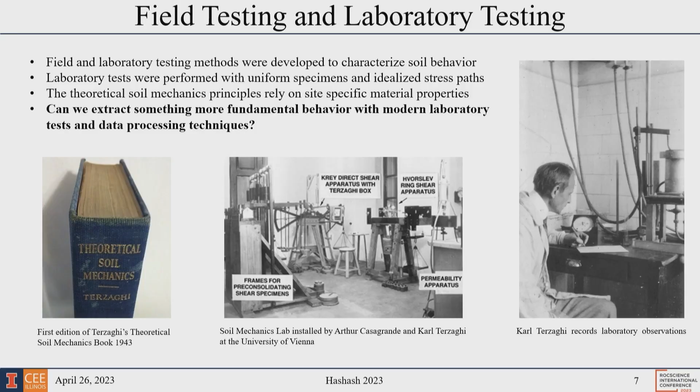And the question would be, can we extract something more fundamental in terms of behavior? That's the same thing that Karl Terzaghi has to deal with at the time, but now with our modern laboratory tests and data processing techniques. We're still doing laboratory testing, field testing, data collection. The question is, do we keep on doing it the same way, or should we be doing it differently?

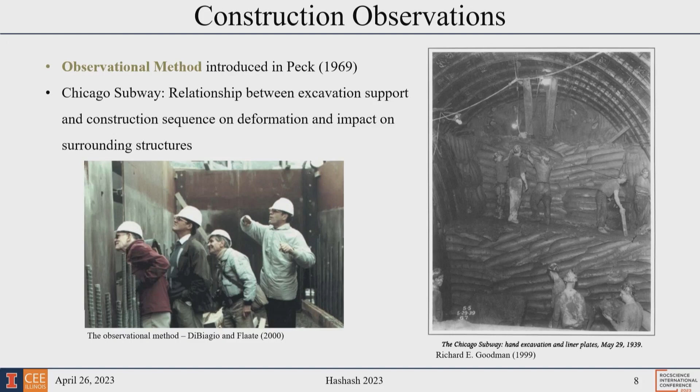The observational method has been very fundamental. It's a cornerstone of geotechnical engineering. And kind of the terms were coined during the work on the Chicago subway, where a young engineer by the name of Ralph Peck was the deputy of Karl Terzaghi to go and watch over construction. Professor Peck carried these concepts further and developed them and coined the term of the observational method. And the idea is you develop an initial design, but then you have to adapt during construction as the true nature of the ground is revealed and the true nature of the construction, means and methods, happen.

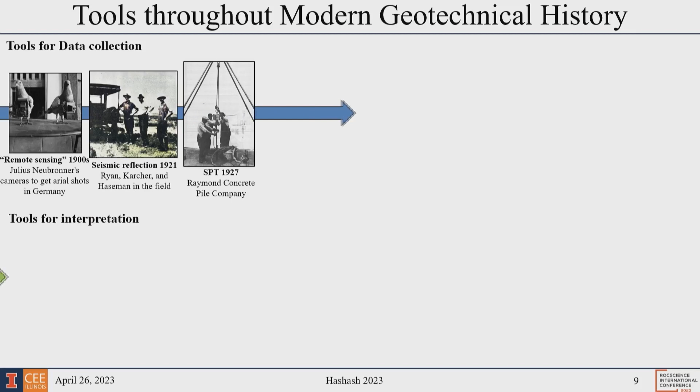Our data collection tools have evolved. We had the remote sensing from the very beginning, sort of early 1900s. But nowadays, we're dealing with things such as InSAR and the Internet of Things in terms of monitoring. We are able to collect a lot of data.

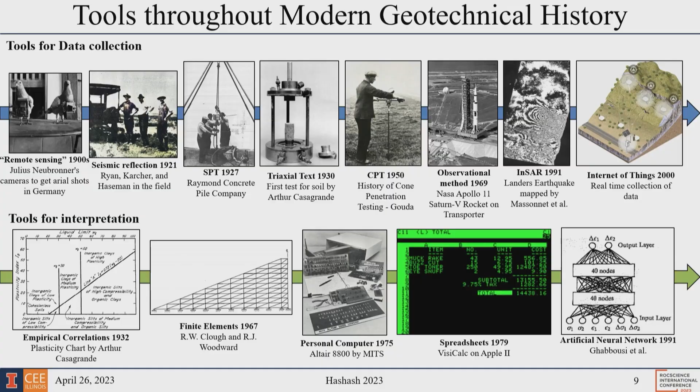Our interpretation tools range from simple graphical interpretations, which are, by the way, extremely important for us, to artificial neural networks, these really interesting black boxes that do things that we like to think are actually relevant and important for us. In geotechnical engineering, we've been working with machine learning since the very beginning.

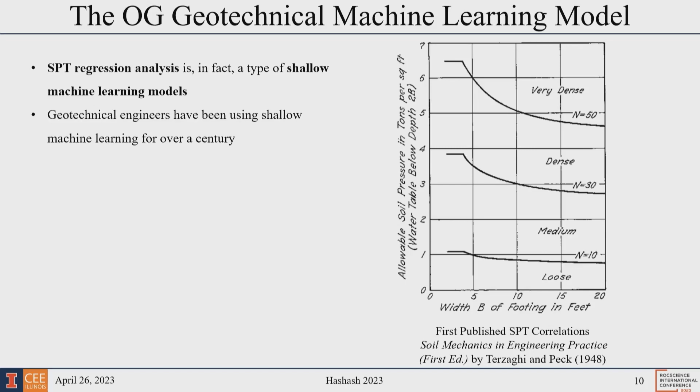This is the OG, the original type of machine learning, whereby you're looking at a correlation between an allowable soil pressure and a footing vis-a-vis different types of soils, for example. Other types of correlations, you can think of them as what we call now shallow machine learning. These are the correlations that we use extensively in geotechnical engineering, and that's really something that it's important now with the new tools to think about in the right context as well.

Of course, when we started the modern adventure of geotechnical engineering, we were suffering from the lack of data. We are facing the opposite problem nowadays, which is a lot of data, maybe too much data. Or maybe it is that we do not have the appropriate tools to manage that data and tease out, extract knowledge and information from that data that would be helpful for us. So that is something that we want to explore.

So let's talk a bit about artificial intelligence. Those of us who have been around the block a lot have seen booms and busts in that technology. And it seems we're at the cusp of something different nowadays.

If you know about Alan Turing, he solved the Enigma, and was a major role in defeating the Germans during World War II. Actually wrote about it in a journal called Psychology and Philosophy, which is interesting. Computing machinery and intelligence is what we want, a machine that can learn from experience. So the idea of artificial intelligence is not new. It's just that people had a vision, and it took a while to realize that vision.

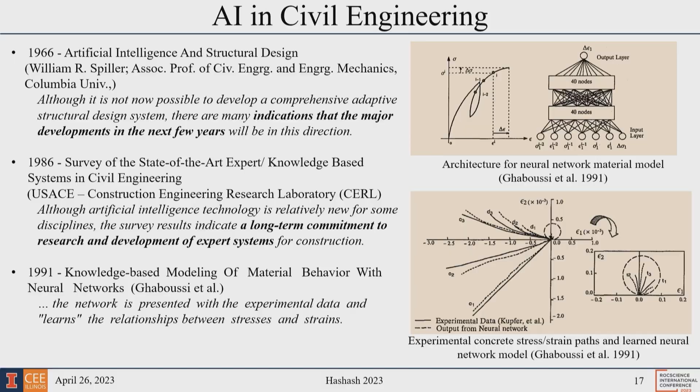So let's show you some selected applications in geotechnical engineering. I'll talk to you first about tunneling-induced ground response and seismic site response analysis. Let's start with tunneling-induced ground response. I'll talk about three topics: operation optimization, ground condition estimation, and tunneling-induced settlement estimates.

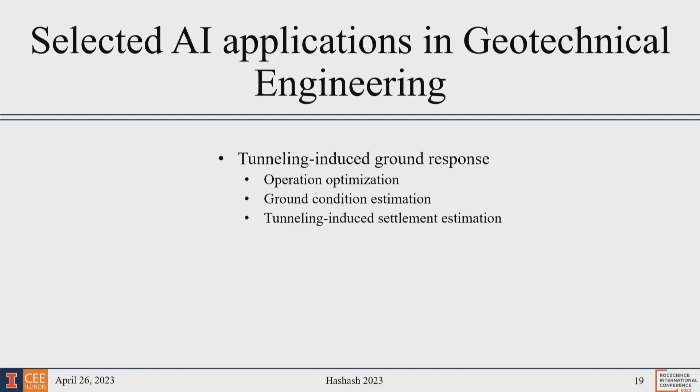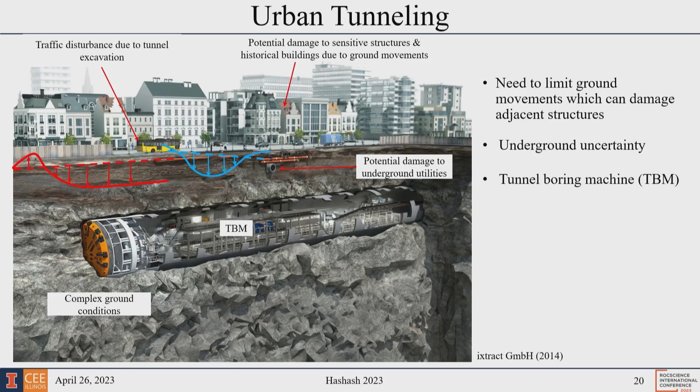Modern tunnel boring machines are amazing technological innovations. If you haven't had the chance to be familiar with them, I encourage you to do that. They're highly automated, very capable, and they're in fact allowing us to tunnel through ground that would have been difficult otherwise, or not using non-mechanized tunneling machine technology. They have a lot of sensors throughout, that's how they do a variety of controls. The number of sensors is a lot, and I'll give you a sense of the data in a minute.

But there's all this data. If you think about the tunnel boring machine, it is one big borehole or CPT or a probe that you're taking through the ground, and it's reacting to the ground. So can I use it to tell what the ground is or how the ground will behave? Can I take that information that I'm collecting and do that?

So the first thing is TBM operations. You're trying to steer it, make sure the tunnel goes in the right direction. Then trying to figure out how to adapt to varying ground conditions, because no exploration program is perfect. And then how we can do some type of estimate of ground movements, which is a really big deal in urban areas, whereby you're trying to minimize ground deformations. So I'll talk to you about AI applications in these three.

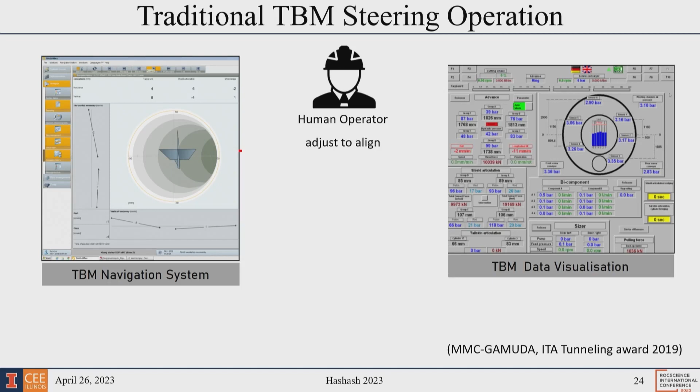So let's talk about operation optimization. What it is, you're trying to make sure that the TBM remains on track. If you've ever been down in a TBM and looked at the controls, there's that kind of cross, and you're trying to make sure the dot is matching it. You can manually adjust the various controllers to align it, or you can actually use an AI type of model.

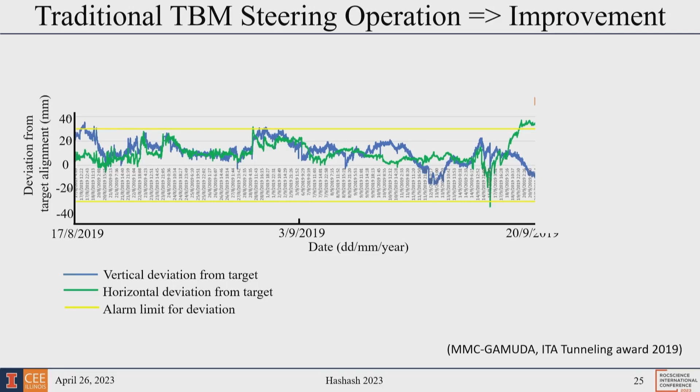If you go beyond it, you're really getting into territory that you do not want. This is manual control, and you can see how there's a lot of oscillation. This is all controlled by an operator.

But now if you use a planning AI type of algorithm, you can see it very rapidly converges to the exact location. It's taking all that feedback from the various sensors and actuators, and now it's able to steer at a level of precision that is unprecedented. And that's because we took the human out of the loop and let an AI planning algorithm do that for us.

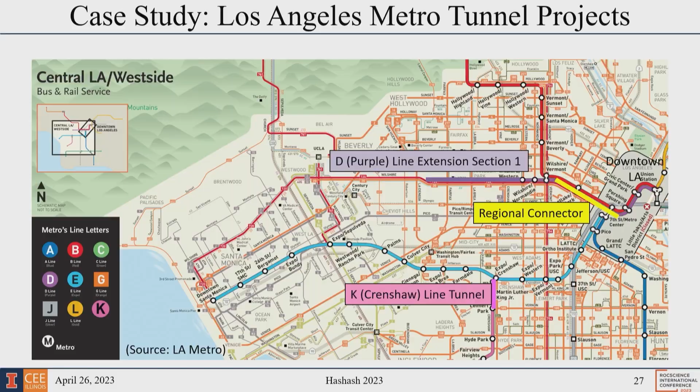So now let's talk about another application from these tunnel boring machines, which is ground condition estimation. We have a collaborative work with NSF and Los Angeles Metro, where, as some of you know, there are several lines being built and more to be built.

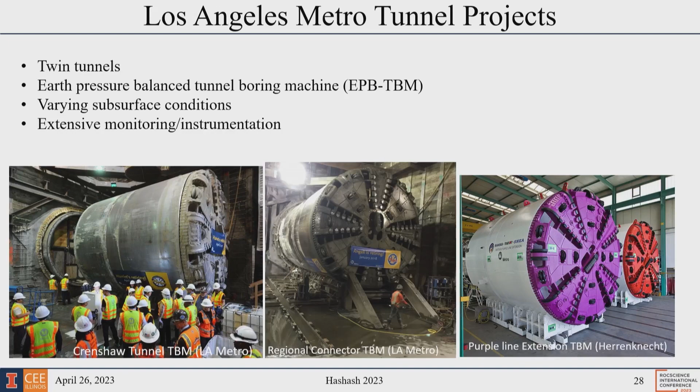The idea is to see if we can get all of their extensive monitoring data and try to make sense out of it. So we picked several lines, we're collaborating with them, and this is an ongoing effort. Fortunately for us, as part of an extensive collaborative effort, we are able to access all the data that they can provide us. So we're looking at the Crenshaw line here, and there's data along this line - it's just 1 mile long. We have about 3 million ground movement data points and 1 billion tunnel boring machine sensor data points.

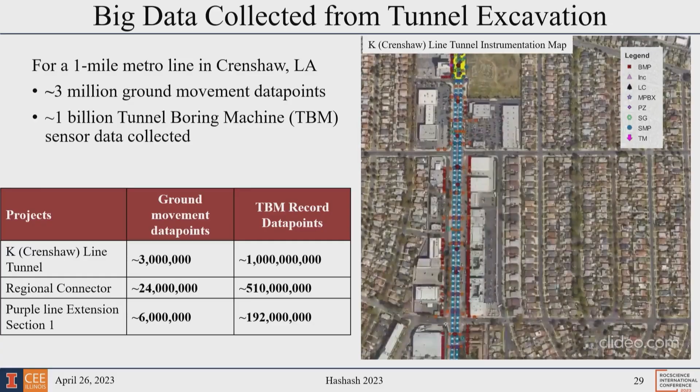We cannot, as humans, deal with this much data. We therefore selectively pare it down to make sense out of it, but by doing that, we're actually losing a lot of information. Can we use all that information?

So one thing we tried to do is use all that TBM input to estimate ground condition. And differing site conditions is always a big deal in tunneling. So we went through a lengthy exercise, and I can elaborate on it later in the Q&A of how we selected those.

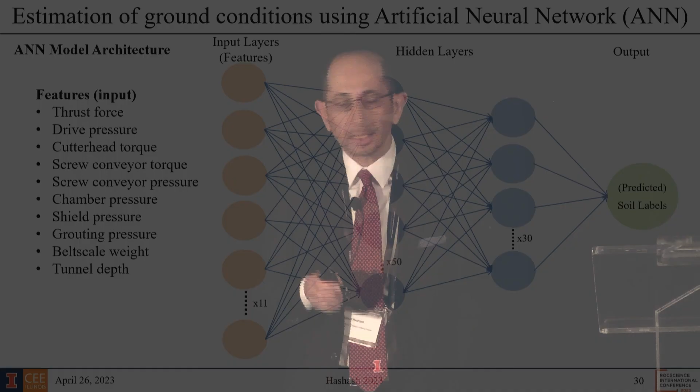We selected this data and used an artificial neural network which has an input layer, an output layer, and two hidden layers. The exact architecture of the neural network, by the way, does not matter as much - it has a little bit of play, but that's not the purpose of the conversation here of how to select it.

The idea was: if I use that input, can I have soil labels so that I can look at the ground? For training data, we used the site exploration data. They had a number of boreholes along the alignment, and we assumed that the soil label applies within a diameter of about 25 feet around each borehole.

We use the data within that 25 feet to train our neural network. So at the locations where we have boreholes, that's when we extracted the data, but then we also split it - part for training, part for prediction. We ended up having about 5,000 TBM locations that can be labeled from one borehole, because remember, the resolution of the TBM is very high.

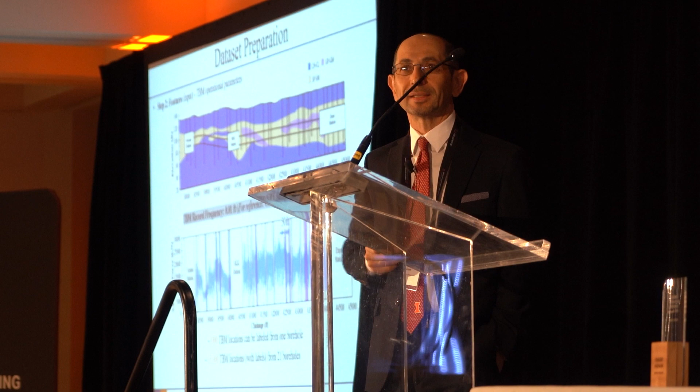In fact, for reference, the TBM recording frequency is 0.01 foot, while CPT sampling frequency is 0.1 to 0.3 foot. So you have a much higher sampling frequency from a TBM compared to a CPT - think about it that way. We need to start considering these factors in how we use all the tools available to us in ground characterization and addressing our engineering problems.

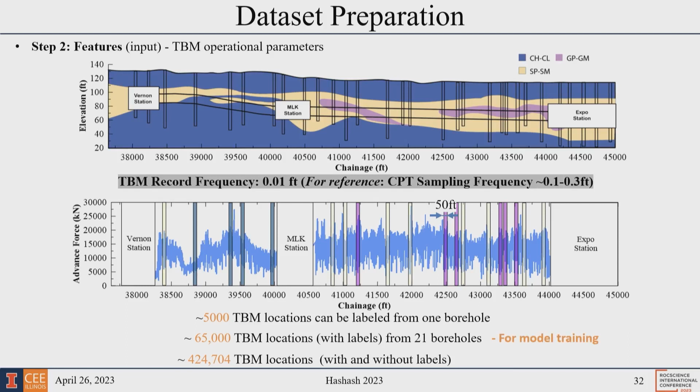So we had about 65,000 TBM locations with data labeled from 21 boreholes, and the remaining locations would be 424,000 locations with and without labels for model training. Then we generate a continuous profile for where we don't know the information, and let's see how that works.

So we split the data 70-30, 70% for training - that's where we know the information from boreholes. And we had the confusion matrix - we heard about the confusion matrix yesterday - and it showed us actually pretty high results.

So look at the diagonal part - the value close to 1 is like perfect prediction, and as you can see, the numbers are very, very high for the testing data, for the training data, and for the whole data set. So we're doing very well correlating the data with the ground condition. We ended up with about 88% accuracy - good enough, in my opinion.

So what we did is said, okay, if you're an engineer, you develop a soil profile - that's an interpolation between the boreholes. That's what we do, sometimes put in a baseline report on which you base differing site conditions. Then we said, let's use our artificial neural network to see what it would tell us about ground conditions between the boreholes.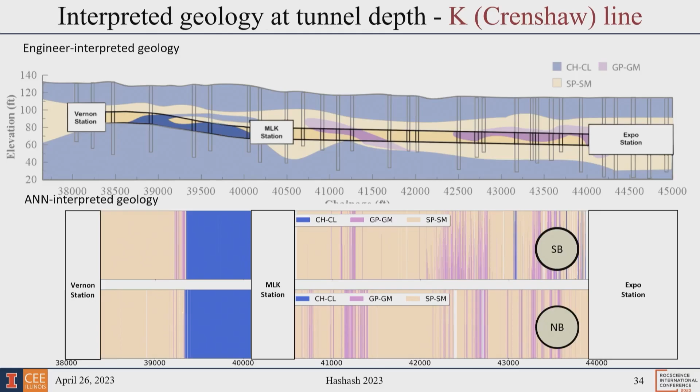In some places it shows us things that are different, and maybe they are indeed different than our interpretation. I'm not saying our geotechnical interpretation, the profile, is necessarily correct - it's our best estimate. But now I have TBM data I'm using to interpret it that way, and I consider it potentially equally valid as to what kind of ground conditions we've encountered.

So it does a pretty good job and has a role to play. It's not only here - you might say, well, you already completed the project. That's fine, but think about projects where you're doing things on the fly. We can do that. Training these neural networks is not time-consuming, it's fairly quick.

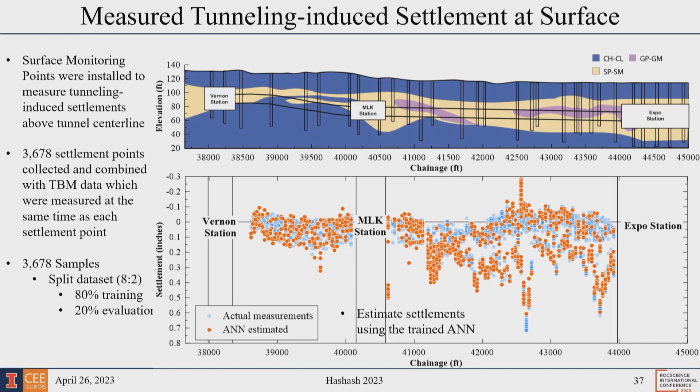Now let's talk about another application - tunneling-induced settlement estimates. Similar set of inputs, and we looked at the output. This is the alignment stationing along the alignment, the vertical axis represents settlements, and the blue points are the measured settlements. We did the training the same way, and you can see the estimates of settlements track very well with the measured settlements.

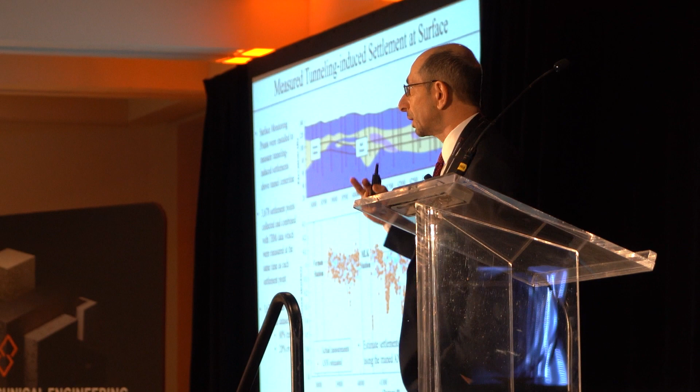So that's useful in areas where you have potentially missing data or some concerns, because you can use the TBM parameters to estimate what kind of ground deformations you get, and that helps in imposing controls on the TBM. It could even be used by owners to make sure the contractor is doing proper face control, proper shield control, pressure controls to limit ground deformations.

We're extending those - we've already extended them to other lines on the LA Metro, and they work well. That's the exciting thing about it. Let me shift now to another application. I'm trying to give you a sense of where we can apply it and how successful we are.

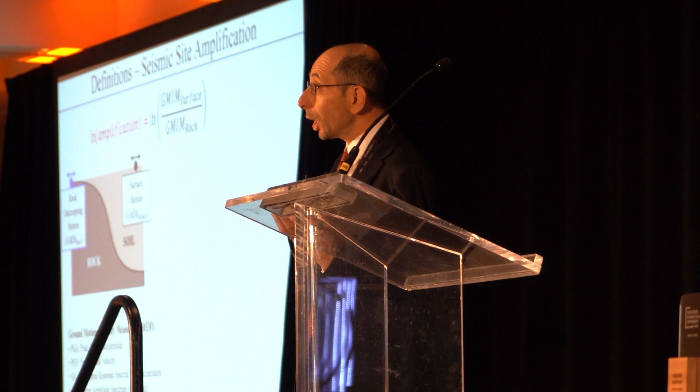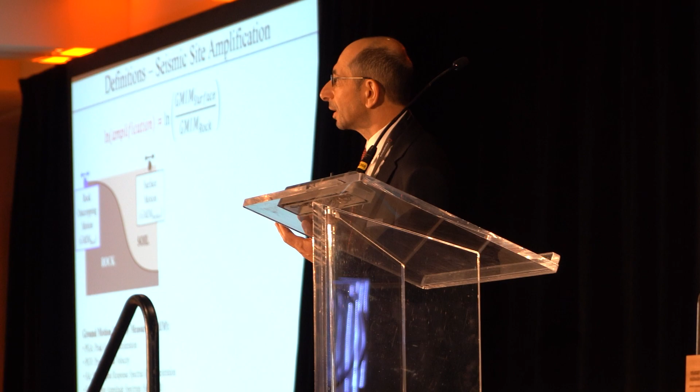Another one is site response analysis. This is something Professor Rathje and myself have been working on for years with other colleagues. What's the problem? If you have ground shaking, the ground motion at a rock site will be different at the soil, because the soil itself does something to the ground motion. It filters usually high frequencies and amplifies low frequency long periods, causing site amplification.

We'll talk about the definition of an amplification factor, which is a measure of the ratio of an intensity measure at the surface over an intensity measure at the rock - it could be peak ground acceleration, for example. We decompose it into a linear and a nonlinear component. A classic model would look something like this: the amplification ratio, the natural logarithm of it, would be a function of VS30 - the time-averaged shear wave velocity over the top 30 meters - plus, say, effect of natural period, plus a nonlinear component.

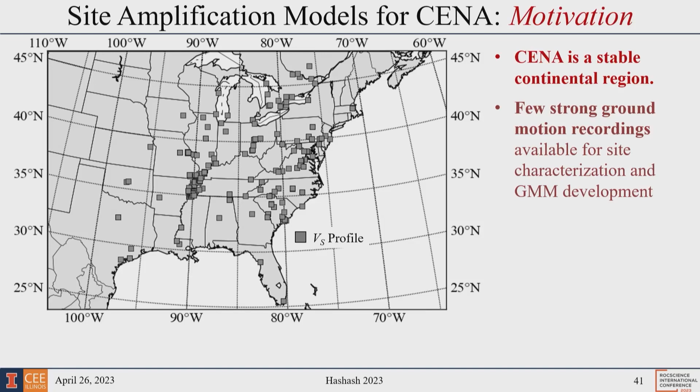Now we wondered if a neural network could do something similar, whereby I'd have the exact same input and some similar output. So what we did - this was a study as part of NGA East, Next Generation Attenuation in the Eastern North America - where we do not have lots of data. So we did a lot of simulations, a large-scale series of simulations.

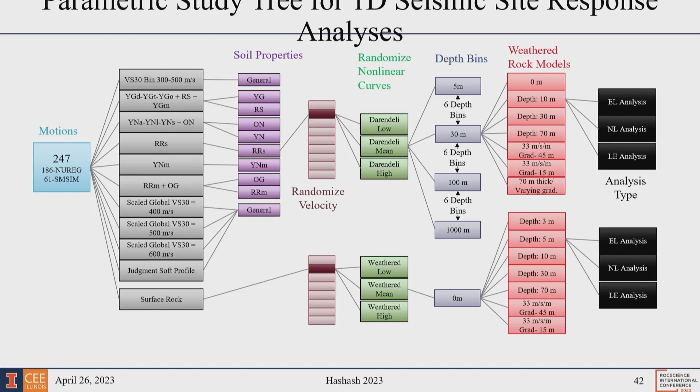It's actually the largest ever done, whereby we encompassed varying ground conditions, a lot of different soil properties, depths, rock conditions, and performed linear analyses, equivalent linear analyses, and nonlinear analyses, using software called DEEPSOIL - some of you may be familiar with it. We ended up with about 3.6 million simulations. You can't do simple regressions with these - well, we tried to get an estimate with these models.

We developed some amplification functions, some of which are already being used by the US Geological Survey in their hazard maps. This is one way of presenting the data. Looking at the horizontal axis, VS30, vertical axis, the linear amplification, this shows the simulations.

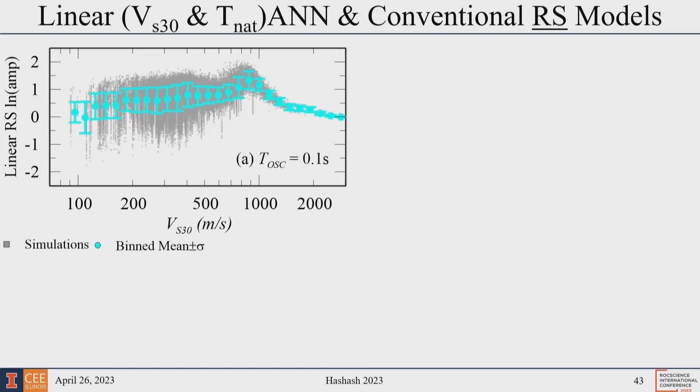This is the bin mean of the data. We're looking at a conventional functional form for the amplification function, a model called L5, which has both VS30 and natural period. You see how it covers the data. And then we have an artificial neural network, using the exact same input with the data.

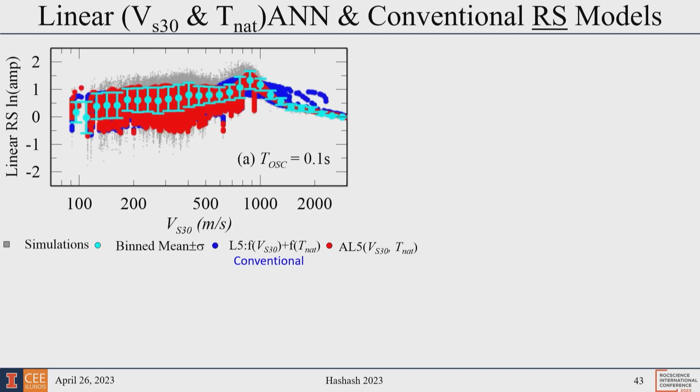What's nice is that artificial neural networks are data hungry, and we had a lot of data to use them. What was interesting is the artificial neural networks were able to capture this behavior. But when we looked at the root mean square error, the same data was used for a conventional regression and for an artificial neural network.

We ended up with a 21% reduction in root mean square error of linear site amplification, on a log scale, by the way. Just keep that in mind. It's a log scale, which means it's a huge reduction in the error.

Same data, same input. So if I give you something, I would hope that you would jump to the one that doesn't give you as much error. In this case, it's an artificial neural network. It was able to capture the whole behavior.

Everything I've shown you thus far is what I would call a rather simple application of artificial neural networks. Now, is there a way to actually extract underlying behavior, truly discover behavior? Something that is really difficult for us as geotechnical engineers. So I'm going to introduce the self-learning concept.

I acknowledge Professor Jamshid Ghaboussi, who took me under his wing when I was a very young faculty member. We spent lots of time talking about this. I'm going to give you applications to excavations, laboratory testing, and then how we can use that to predict real problems. So let's go back a bit to feedback control theory.

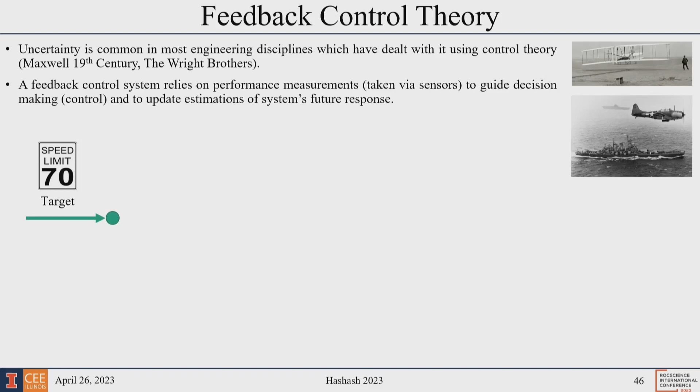Feedback control theory - I think most of us may be familiar with cruise control. You set the speed, and usually if you're doing it manually, you have to do it yourself. You put your foot on the accelerator or the brake, and you adjust your speed. I know we're not very good at maintaining the speed that way, right? So there is an input, and then there is an output.

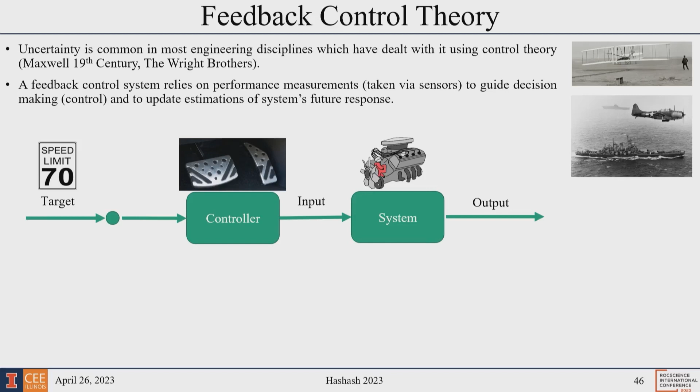Now, of course, people have introduced the automation of that, which is speed cruise control, and it does a very good job, but it's dangerous, right? Because if there's a car in front of you, it could hit it, hence adaptive cruise control. The relatively newer cars have that. I love it, it's great for long-distance driving, I don't have to worry about it. The car itself accelerates, decelerates depending on the car in front of you, and reaches a maximum of the speed you set. So control theory is really, in essence, what the observational method is.

Now let's look at another way of looking at the observational method. You have your engineering design objectives. You develop your site investigation, modeling. You have your engineering design. You go for construction, you collect the data, and then you try to see: is it matching your estimated behavior? If not, you make adjustments and you continue.

Can we automate pieces of that, or all of it? And that's where it becomes a problem. So I'm going to talk about the large data sets - I'm not going to spend much time on that - and talk about an AI-enabled system update.

In order to do the update, it is actually an inverse problem, right? And there are the regular problems: you have an input, system model, output. You are pressing the accelerator, and then the car speeds up somewhere, and then when you see the speed, you readjust the pressure, or automatically the car controls.

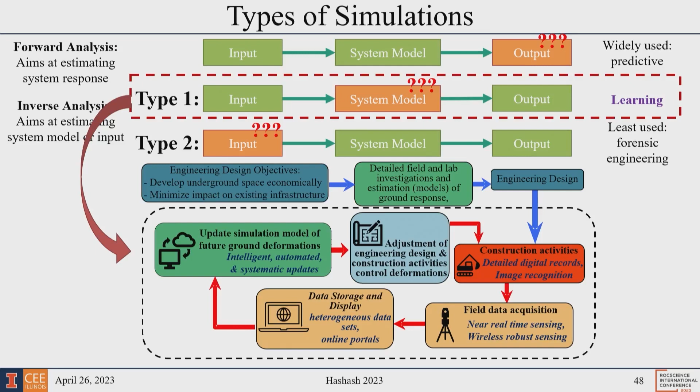There's another type of inverse problem: you know the input, you know the output, you just don't know the system model. And then there's one whereby you know the system model and the output, but not the input. The one we're concerning ourselves with for the observational method, which is a form of a control loop, is actually this type 1 inverse analysis problem. So now let's talk about a self-learning concept.

So in the field, and I'm going to talk about excavations - those of you who know about my background.

I did a lot of excavations, starting with my PhD work, whereby you have some construction sequence going on, so hopefully you kept a good record. And then you have instrumentation, you've measured the response. Now, we always talk about the field is our lab, right? That's what we say in geotechnical engineering. And the behavior we're measuring is a result of fairly complex interactions of our soils.

So can we extract that underlying soil behavior? And of course, I'm here to say, yes, we can. Let's explain to you why and how.

So the way the self-learning concept works is the following. I have two things, and this also comes from a background in finite element modeling. You have equilibrium and you have compatibility. Equilibrium is the equilibrium of forces. Compatibility is displacements and strains, okay?

So the first analysis we do, we do a conventional analysis whereby we're removing our soil layers, and this would be an equilibrium type of analysis. Of course, our finite element analysis will give us both strains and stresses, but since the force and stress conditions are most correct, we're going to say that the stress field I'm going to compute in this analysis is correct, or closest to the correct value of stresses throughout the system.

Then I'm going to run a second analysis, and in this one I'm going to impose my deformations. I'm not going to impose the construction sequence, I'm going to impose the deformations with appropriate boundary conditions. And because of compatibility constraints, the strains I'm going to get out of that are going to be probably reasonable. So from one analysis I'm going to get stresses, from another analysis I'm going to get strains. Stress, strain, soil behavior, right?

So now, instead of using a conventional material model, I'm going to use an artificial neural network material model. Initially, I'll train it to represent linear elastic behavior over a small range. But when I get those stresses and strains, I'm going to retrain my artificial neural network, and forget the data on linear elastic. I repeat that for a given stage of construction, and then for all stages of construction, until the stress-controlled and the displacement-controlled analyses give me about the same answer. That's the convergence. And then I will make a claim that the resulting material model closely represents the behavior that is relevant for this problem. You probably notice I'm using a lot of cautionary or qualifying words there.

Now, when I mentioned inverse problem, you're probably thinking uniqueness. Well, we can talk about that in a Q&A answer. I should just let you know, all the applications we've done with this problem, we've never run into a uniqueness problem or non-uniqueness. So then we can claim that we can use it in a forward problem.

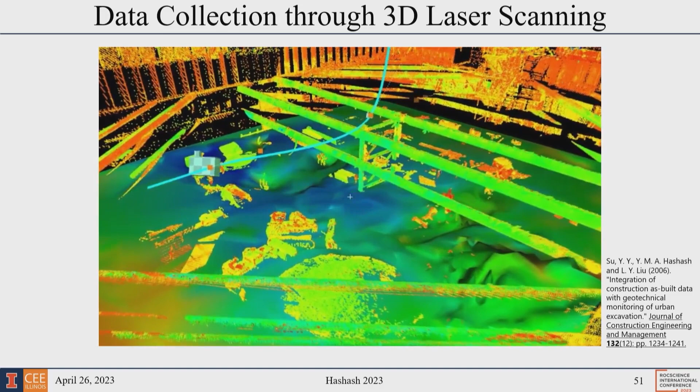So I'm going to show you how we've applied it. Now, again, this has been enabled by our ability to collect massive amounts of data. We can actually scan all the details of our construction sequence, so you need to be faithful to the construction sequence in the field. It doesn't matter what's on the design drawings if you don't go out to the field. I actually had, in many places, to go down to our resident engineers to take the sketches from their drawers, which they were about to throw away, so I could have a correct construction sequence.

And then the data — we applied it to one, the Stata Center, and thanks to Professor Whittle, my former PhD advisor, who got access to all of that data. We had some sections there, so we could actually perform some self-learning simulations. This is the data of the measurements.

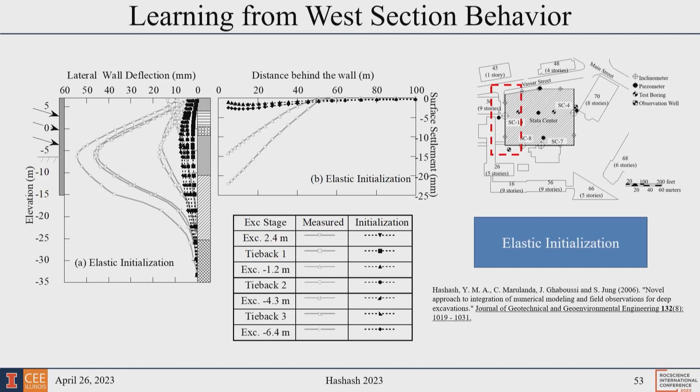And then what we did is we initialized the material model, the first analysis, to represent linear elastic behavior over its defined strain range, and that was the initial estimate — sort of an elastic initialization. Then we started learning, this is from stage 3, and then from all stages.

So you may say, okay, so what? You've learned what was there. Remember, our objective is not just learning the prediction of the displacements. We are interested in extracting the underlying soil behavior. I'm starting from a linear elastic behavior, and I ended up with some type of interesting neural network that can give me this behavior, which actually includes things such as small strain nonlinearity and other factors.

So what we did is we wanted to see, okay, how does the behavior computed by the artificial neural network relate to what's measured in the lab? This is some data that existed way before we had this information. The dashed line represents the initialization of the neural network, and the symbols represent laboratory data.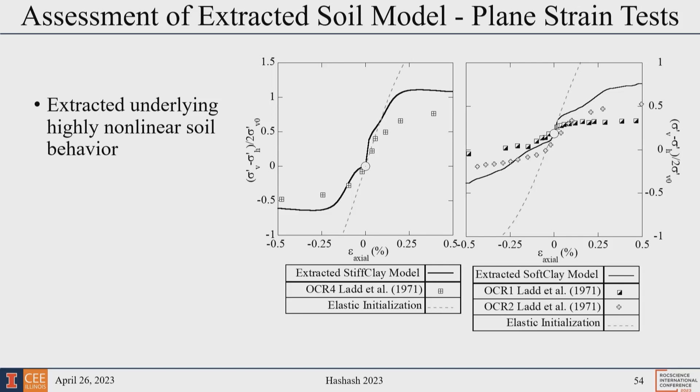And the black line represents what the artificial neural network would give us for this. Now, you can look at the glass as half full or half empty. Half empty meaning you didn't match the lab data. Half full would be, wow, we were actually able to evolve the behavior to get close to that. What we learned is that it's important that you get close to the actual laboratory measured behavior, but you don't have to exactly match it.

Remember, when we do things in the lab, we have other limitations, right? It's a sample that we selectively picked under certain conditions, and then you have the whole field conditions, the in situ conditions, that would vary. We've tested that on many different applications, different excavations, and it's been fascinating to see how we were able to represent the small strain behavior.

So that got us thinking about, well, how about laboratory testing? Should we still do it the same way as we've done it before? Usually we've been striving to make sure that the triaxial test imposes stress conditions as uniform as possible so that you represent a single element. But that's a problem, because then I have to do so many different tests to capture conditions under multiple stress paths, which is what you actually need in your finite element analysis. You need to represent behavior under very complex paths.

So we said, okay, let's now make the triaxial test deliberately non-uniform by putting in lateral constraints. We built a device, we did photogrammetry there to collect all that data, and then we started training it.

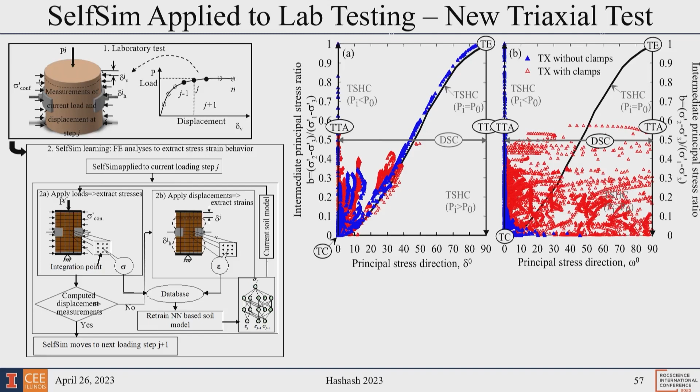This is an interesting figure. On the vertical axis, it's a b-value, which tells you something about the intermediate principal stress relative to the major and minor principal stresses, and the horizontal axis represents principal stress direction. The conventional uniform triaxial test is a single point at the bottom left. Triaxial extension is also a single point. From this single test, we plotted our stress path and the data points, and you see how much of the space it covers. That could only be extracted through self-learning simulations because we did an inversion essentially there.

We did these parallel analyses, stress control, displacement control. So we applied that concept. We said, okay, if that works, remember the DSS, direct simple shear? We don't like it because we don't know the state of stress very well. But actually, it's a fantastic boundary value problem. So we used it, we treated it as a boundary value problem and applied self-learning simulations to it. And we extracted behavior, and it covers a pretty nice part of the stress space.

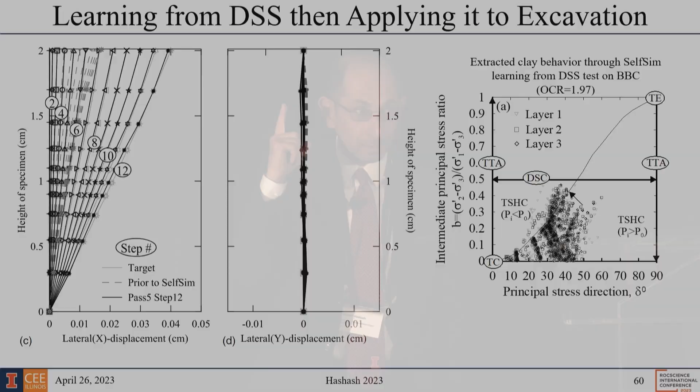This is the DSS on Boston blue clay, for which I had my excavation problem. So I said, okay, now if I take my DSS test, the neural network that's trained from the self-learning simulations for the DSS test, and try to predict the excavation, do I get anything reasonable? Single test - keep that in mind. One laboratory test. Well, guess what? We used the same problem.

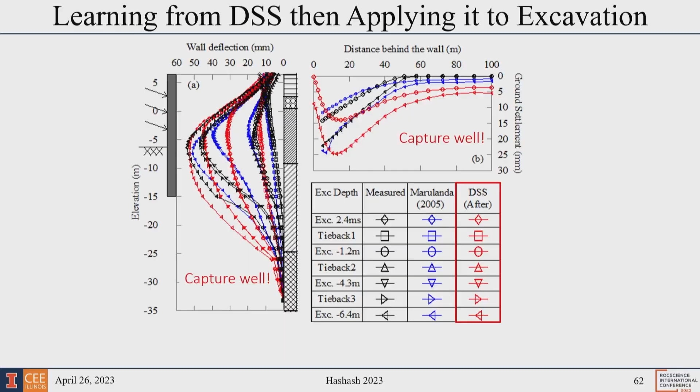First I'm going to show you this: the measured data is the black line. The blue is the self-learning simulations from the actual excavation. And then the last one is from the DSS test, whereby I did not use any data from the excavation, and look at the predictions. This, of course, still qualifies as a Class C prediction, but we did not use any of the data from the actual excavation to do this prediction.

Now again, glass half full or half empty. If this was actually a prediction in an engineering design, people would be having a party, okay? Because it's that good. Yes, there are places where it didn't match the measurements very well, but that's okay.

So now let me go to the last part of my presentation today, and that's generative AI. It's the buzz nowadays. I'm going to talk to you a little bit about what it is, and then we'll go about a few things. Can it write a report for us? Can it give us technical advice? Can it write code? Data mining I'm going to skip, and do desktop studies and some integration of the tools.

So generative AI is that AI that creates new content, such as text, images, or sounds. ChatGPT-3 is one - I'm sure you've heard a lot about it, and you might have played with it. Bard is the competitor from Google, and it's a race now to work on that. DALL-E, for image creation, if you're not familiar with it, is from the same OpenAI project. And there is a sound generator that can generate music, and actually people have generated music from it. There are some other ones as well. So you can ask ChatGPT to explain itself, and it says, well, it tries to generate human-like responses and assist in technical support.

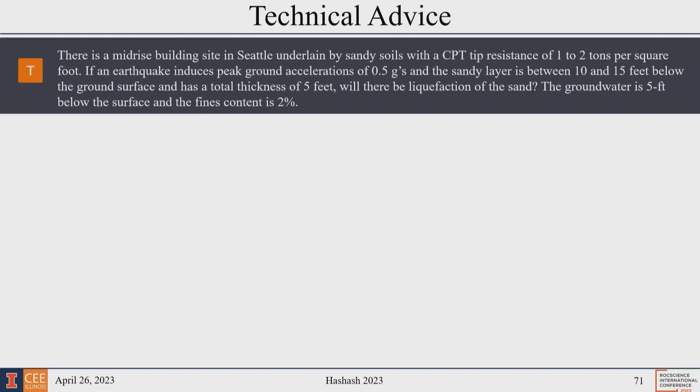Now, technical advice. So we had a mid-rise building in Seattle with some CPT tip resistance, with an acceleration of 0.5 G, sandy layer between 10 and 15 feet, thickness of 5 feet. Will there be liquefaction? The groundwater is 5 feet below the surface, and the fines content is 2%. This is literally the prompt that was given to ChatGPT. And this is what it did.

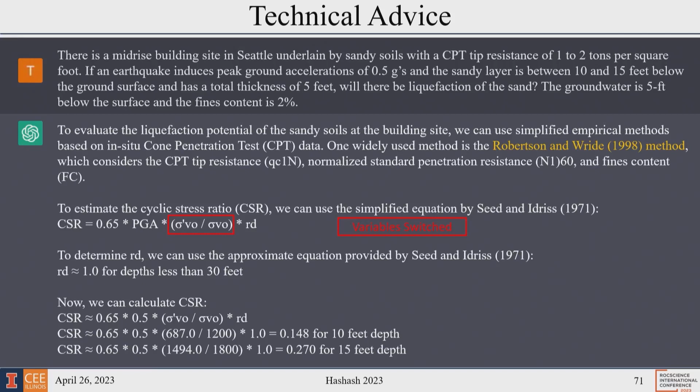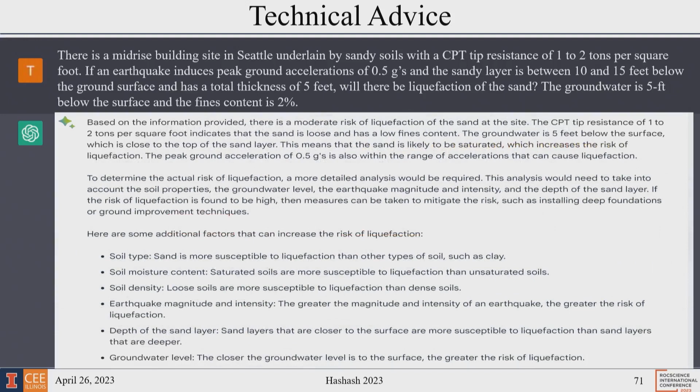It made a mistake, it flipped the stresses for calculation of the CSR. Remember, it's still a baby, okay? But it kind of got a pretty good idea of what to do there. Bard, this is Google's, was a little bit more cautious, but it said that you're likely to have liquefaction. So it ingested enough information from the world to actually make something that I'd have to say is sensible—definitely better than some of my students starting the earthquake engineering class.

So now let's take a look a little bit into the future. How can machine learning be applied in geotechnical engineering? We literally asked that to ChatGPT, and it said predictive modeling, material characterization, geotechnical investigation, risk assessment, construction management, and it has the potential to revolutionize geotechnical engineering.

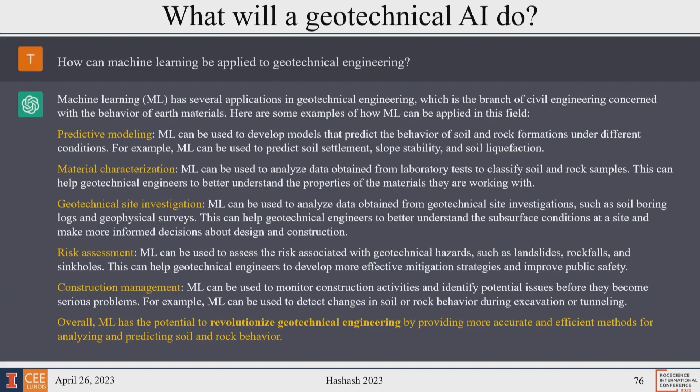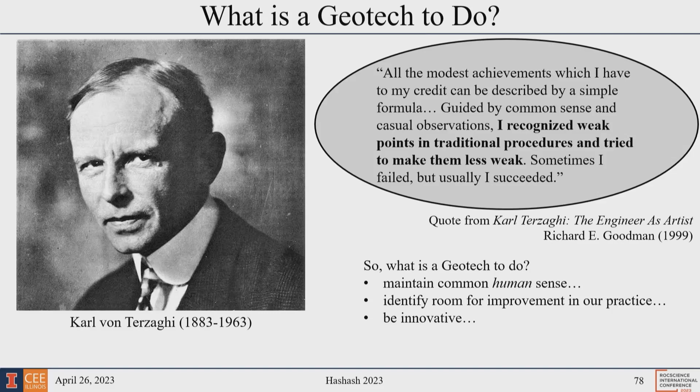So what is a geotech to do? Let's go back to our roots. Karl Terzaghi says, I recognize weak points in traditional procedures and try to make them less weak. We need to maintain our human sense, but also identify room for improvement in our practice.

And this is where these new tools are, but they are incredibly powerful. Just imagine a generative AI that's been trained on all geotechnical literature in all languages, and not only geotech literature, all structural literature, all civil engineering literature—it is likely to be a better engineer, at least than many we know, because it's able to make connections.

So that leads me to my conclusions, and I'm a little bit over my time, so thank you for bearing with me. The tools of geotechnical engineering have changed drastically over the last century, but geotechnical engineering has always been data-driven. AI is improving many parts of geotechnical engineering. Deep learning models can predict the geology encountered, say, during tunneling, from TBM sensor data.

Self-learning models can learn soil behavior and build constitutive models. Generative AI is amazing, can perform basic engineering tasks. It, by the way, passes the professional engineer exam—we tried it, it does pass it, okay. It gets a passing score.

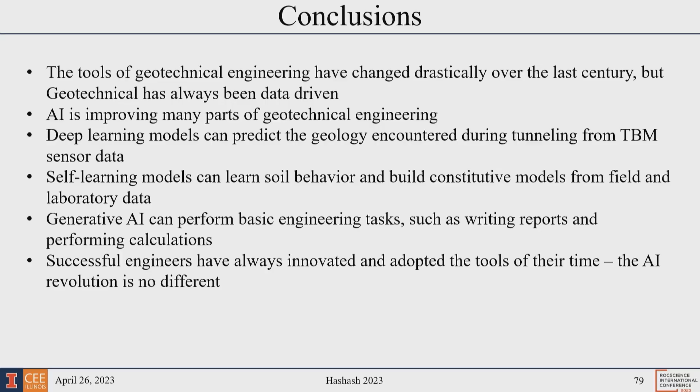So successful engineers have always innovated and adopted the tools of their time. The AI revolution is no different, but it is far more transformative, in my opinion. And so, at the end, we asked ChatGPT to write a Shakespeare sonnet about liquefaction, and it did a fantastic job. And with that, thank you very much, and I'll be happy to take questions if there's space for that.